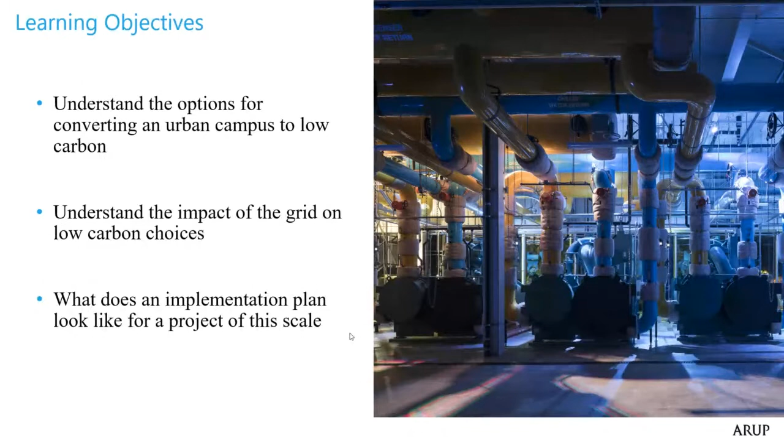So what I hope you guys would get from this are some learnings - basically understanding what the options are and the challenges for converting an urban campus to a low carbon solution, understanding the impact of the grid and the interaction we have with the grid in terms of our low carbon choices, and what an implementation plan looks like for projects of this scale.

So a little bit about our firm, just to give you some context. We are a design consultancy, and we work across the whole urban development theme, looking at individual buildings, city scale, and everything else in between. So my team, for example, we do green building, net zero buildings, etc. A lot of planning work like the stuff I'm going to talk to you about, but we also work with cities and corporations to develop their strategies.

We're about 14,000 people globally. There's about 10,000 projects at any given point, and we've got offices all over the world. In North America, we have about 1,300 employees across 12 offices. I'm based in New York, but I did spend a lot of my time going up and down to Toronto pre-COVID, almost on a weekly basis, to work on projects up there. But I've also worked all across Canada.

One of the things our firm has done over recent years is align ourselves with the UN Sustainable Development Goals. It's a theme that a lot of countries, cities, and corporations are doing as we deal with the climate crisis and a whole bunch of other related challenges. These are a set of goals, I'm sure you're familiar with, that give something of a roadmap about how we'd like the planet to look by 2030. These are various commitments that you make, and then you sign up and develop an action plan to do that. That's been really interesting for us as a firm, because it means we think about the kind of work we do with much more scrutiny, and the kind of projects we want to get involved in - are they actually moving the needle in terms of dealing with the climate crisis, etc.

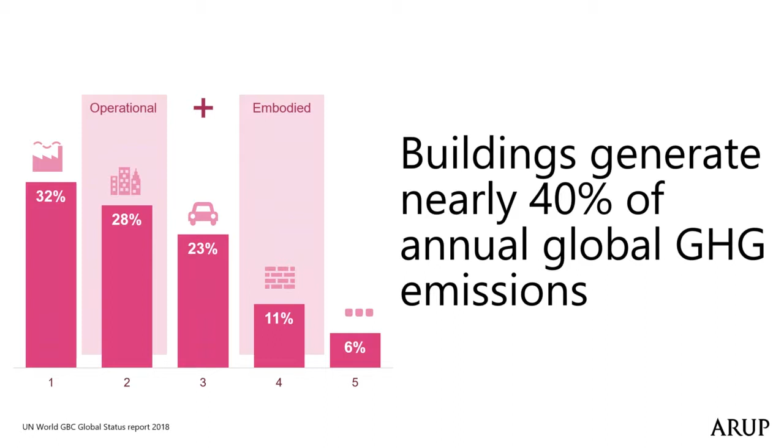But the long and short of it, what it means in terms of meeting some of those targets, the 1.5 degree or even more aggressive reduction, is we need to have a transformational change across our whole built environment, from our transportation, our infrastructure, but also our buildings. And that's some of the work that I'm going to talk to you about today.

So we have developed an approach for doing this kind of work. As I mentioned, the world is urbanizing rapidly, and it's predicted that within 50 years our urbanization centers are going to more than double. So people are looking for space, they're developing denser and denser cities, and then you're seeing all kinds of new cities pop up. I worked on multiple projects in China where you work on a concept plan of some farmland sometimes, and then within 2 or 3 years, an entire city appears from nowhere. So thinking about how those developments are done in a low carbon way is a lot of the focus of our work these days. So we've developed an approach for doing that.

But the challenge is there isn't really a crystal clear answer, it changes everywhere you go. And the reality is, here you are today trying to get to some point in the future, be that net zero or 1.5 degree stabilization of temperature. But the journey to get there over a long period will actually not be a linear journey. You're going to go in different directions, and there's actually multiple pathways to get there.

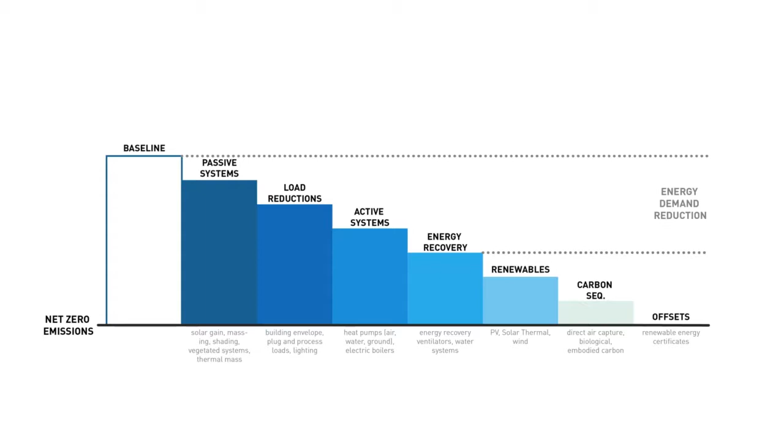We have a whole approach in place for doing this kind of project. Basically, we look at what the goals are, what you're trying to achieve, then look at a whole bunch of different technologies and metrics to screen which technologies would work and which wouldn't, bundling those together into different scenarios to try and meet the outcome you're looking for. Then we develop a whole design to implement whichever option is preferred.

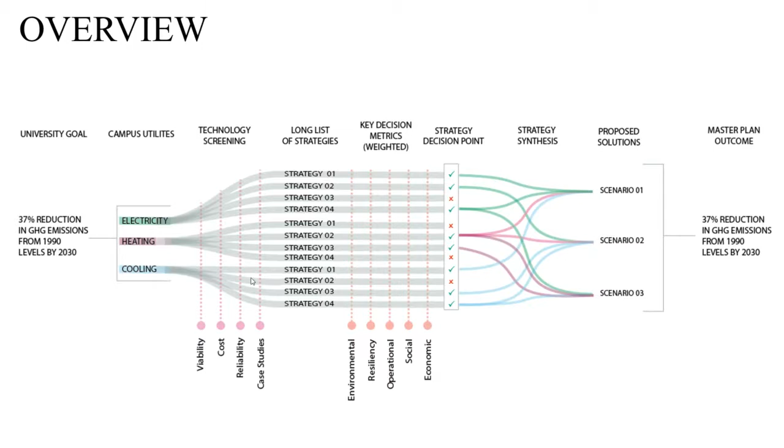The other thing about low carbon planning for campuses, and maybe new development too, is it's not just a technical problem. A lot of people think it's just technical, but it has a lot to do with stakeholders. Within a university you have many stakeholders: yourselves, students and faculty, facilities managers, the people who run the university from an administration perspective, planning departments, facilities, and the external community. There are a lot of different stakeholders involved in low carbon planning, and you really need to consult with everyone.

The other aspect is, as I say, it's not just a technical option, because you can solve any problem technically if you throw enough money at it. It's really about working out the business model that goes along with that - how are you going to pay for it over time, what are the risks involved, and who else do you need to partner with to make it work.

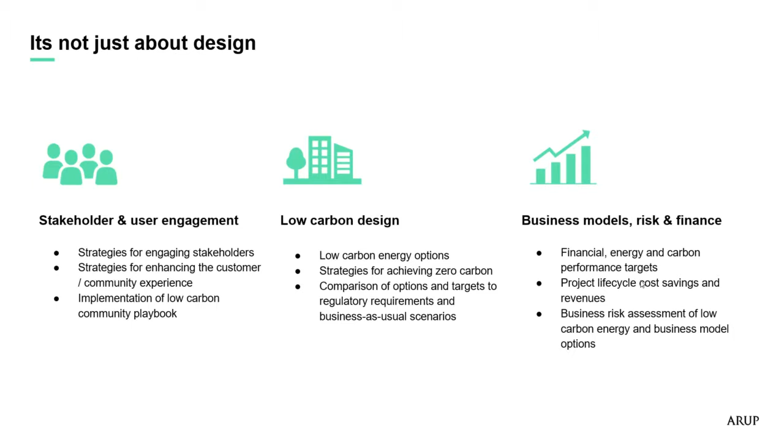You're seeing within the university space a lot of privatization of utilities just now. Universities are saying our core business is education, we don't want to be running the facilities on this campus, that's not our core function. Let's farm that out, someone else can come and do that and just charge us for our utilities. It's also a way universities can make money, because they sell this for someone else to use. There's a big movement for that in higher education just now.

Now I'm going to shift gears to talk about the University of Toronto infrastructure planning work we did, which is the main focus of the presentation. If anybody wants to ask questions, just remember to stick your hand up or put something in the chat.

The university came to us a couple of years ago with three major challenges in terms of their infrastructure. First, the infrastructure, mainly the energy infrastructure, is very old. It's an old university with a fantastic campus and layout. Some of the buildings are well over 100 years old, as is some of the infrastructure - it's been looked after, but it's past its sell-by date.

The second challenge is the university is very successful and growing quite rapidly, with lots of plans to continue growing in the future - so how do they accommodate that new growth? Thirdly was a commitment to reduce greenhouse gas emissions, with some commitments made to reduce by 37% by 2030. We then worked with the university to develop targets for 2050, basically a carbon neutrality target, and how do they achieve that considering they've got old infrastructure delivered inefficiently right now, and they're going to add to the campus with extra buildings that will use more energy.

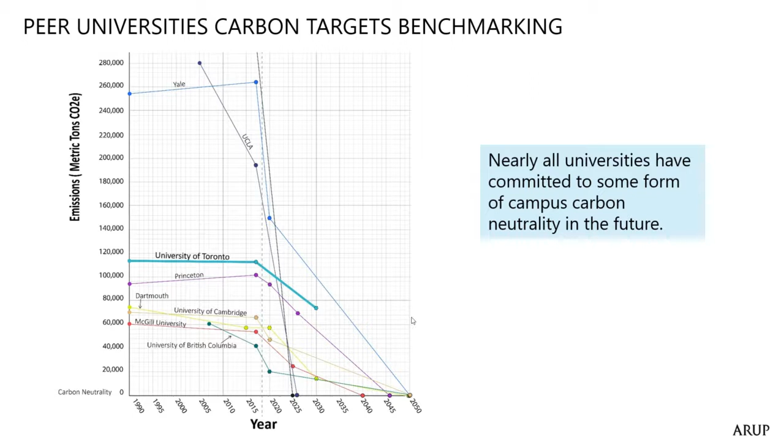Some very progressive universities just blew right past their targets and did not achieve them, so a lot of universities have now revised these targets. We wanted to see where University of Toronto fit in with the pack, so it could develop an ambitious target as well, and continue to be seen as one of the premier universities, ambitious in its carbon goals, because that's important for students and faculty.

And then we look at the climate as well. This talk is mainly focused on decarbonization, trying to reduce the impact on climate. There's this other factor of adaptation or resilience to climate, as in how do you protect yourself from the climate as it's changing.

So that's quite a change. It means if you're designing infrastructure, you've got to deal with increased temperatures, which means you might need more cooling, more insulation, etc. You're getting more hot days, fewer cold days, which could be a good thing, but you've got to design your buildings, if they're built tomorrow, to deal with today's cold weather, even though it might not be as cold in the future. So that poses a challenge.

And then you've got more rainfall to deal with in the urban context - you have to move that away from buildings, reuse it, whatever you want to do with it. Some of these temperature changes can cause issues from extreme heat, which can be challenging for people. Power outages happen because everyone's trying to pull energy off the grid at the same time. Extreme cold still happens too, causing cracked pipes, etc., and then you get flooding as well.

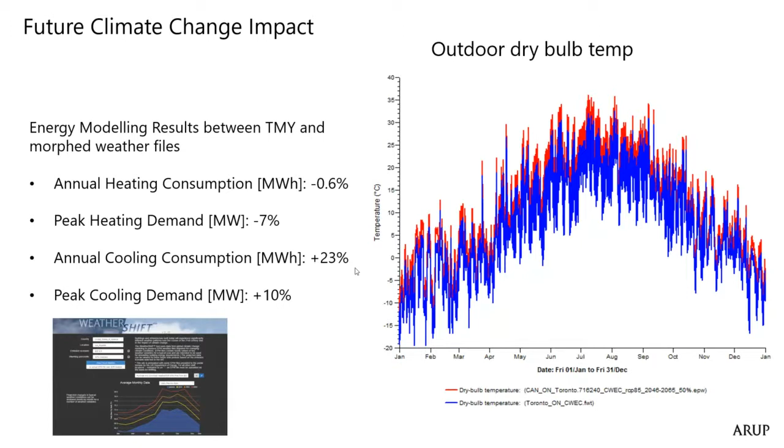We did some analysis here in terms of what this would actually mean for the university - it would mean a reduced amount of heating load over time, but it would significantly increase the cooling load over time by 2050. So it's quite a big change you have to design for in terms of infrastructure.

The other thing we look at as context is what does the grid look like, and this varies enormously wherever you go in the world. Quebec and Ontario have a relatively clean grid. Ontario has a lot of nuclear, some natural gas, a lot of hydro, and some other renewables. Quebec has a much bigger hydro component, so it's very clean. But if you're working in Virginia, for example, in the USA, that's very much 90% fossil fuel based. So that factors into the kind of technologies you choose.

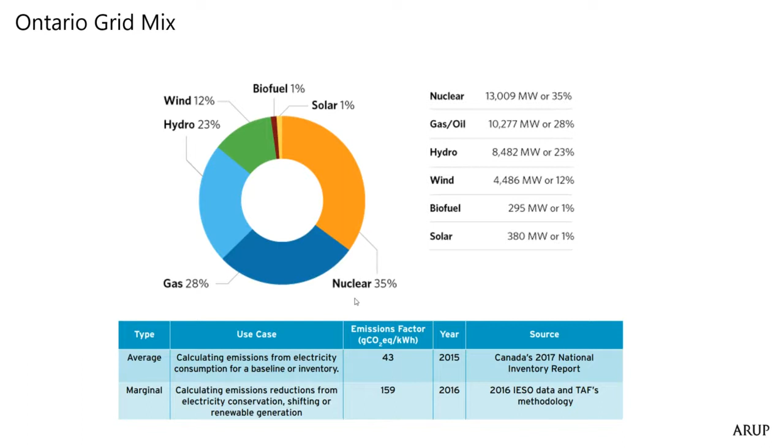The next stage of what we do is pull in the data in terms of existing conditions, how much energy has been used, how much square footage there is, and do comparisons with other universities to see how it's performing. Despite the fact that the university has a lot of old infrastructure, it actually performs quite well compared to other universities, because there's a very good facilities department who maintains it well.

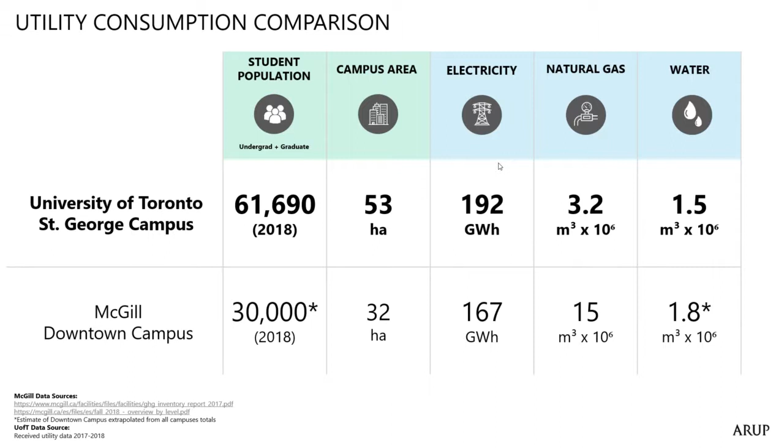Then we start to look at the actual infrastructure that's in place - how it's being supplied. Most of it is centralized within the university by the same facilities team I mentioned, but there are still some buildings that are standalone and not on the centralized systems.

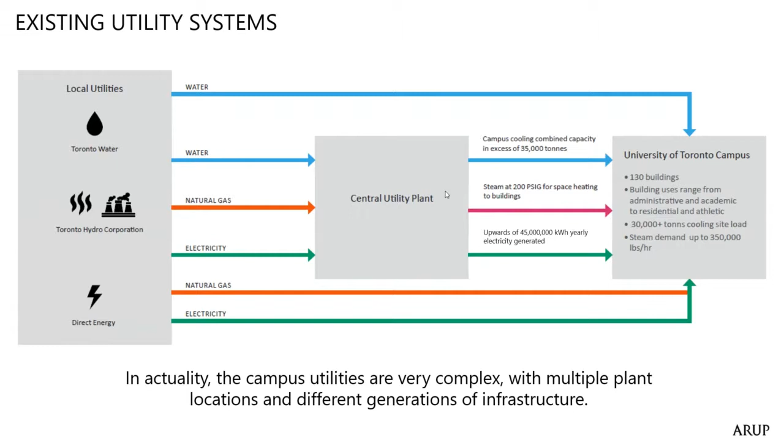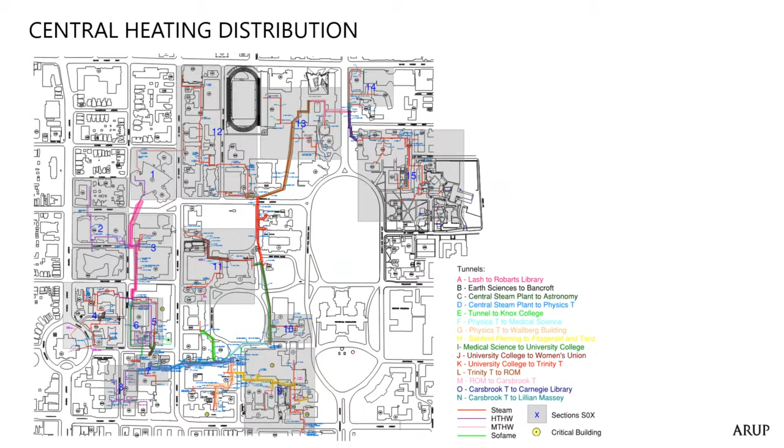This is basically a schematic of all the infrastructure across the university. There's pretty extensive infrastructure going under the streets all around the campus, so dealing with that infrastructure and upgrading it becomes very, very complex.

I mentioned earlier there was some planned growth for the university, so some pretty significant plans are predicted between now and 2050. A lot of that is based on growth plans rather than actual buildings that have been scheduled and designed. But essentially we're talking about an 80% increase in the campus over time, which is pretty significant. When you're trying to drive your carbon and energy use down, adding all this extra growth is kind of going the wrong way, which poses a challenge.

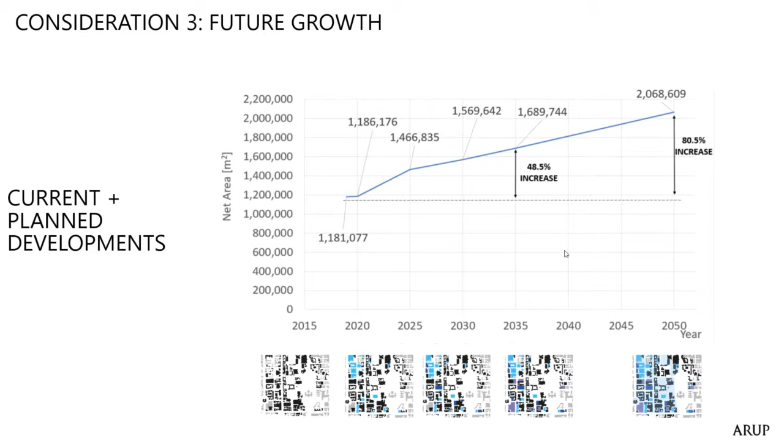But it's not impossible, because as I mentioned before, it's well within our capabilities to design net zero and even net positive buildings now. It depends on the use type—a lab is a big energy hog, and that can be more challenging. But it can be done, it just needs to be thought about very carefully.

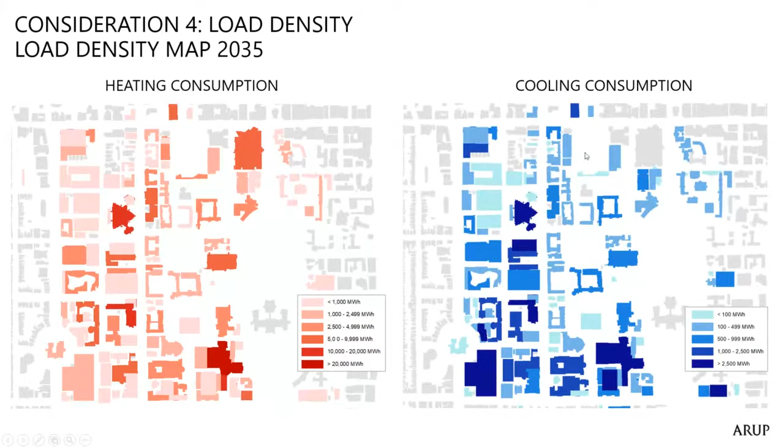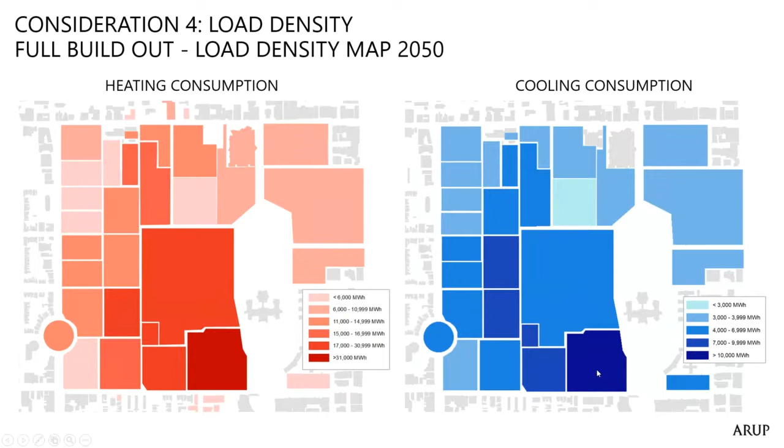So we did some load mapping across the site, and these are heat maps showing where the intense heat use would be, and on the right, where the intense cooling would be over time. When you go to 2050, that increases a lot. So this is all extra energy you have to try and find. The darker the color in the heat maps, the more intense the use—associated with some of the labs, some of the older buildings, and some of the very dense areas.

And this is the same thing with the electrical demand, which increases over time as well.

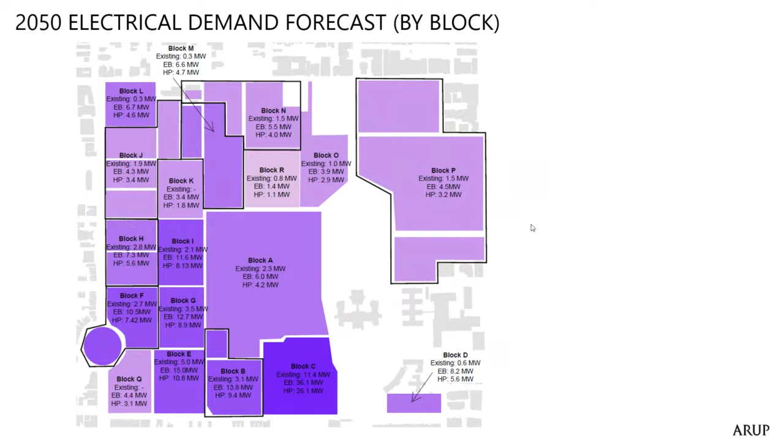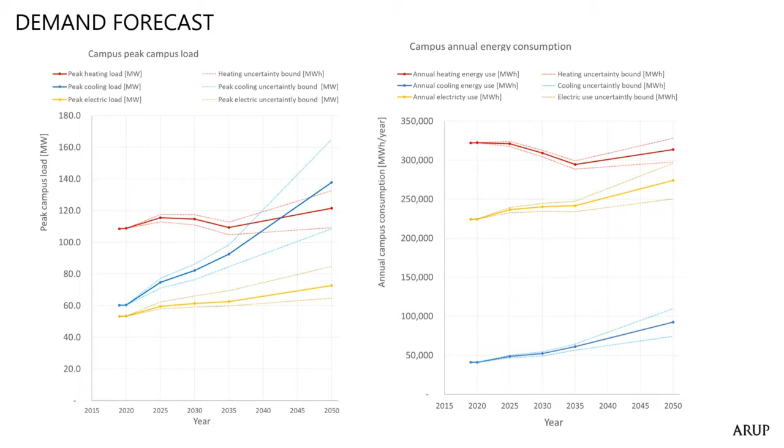So just zooming out for a second—what I was presenting there was just some baseline information of all the things we like to look at to try to understand the problem, as it were. But now I'm actually going to get into what a net zero carbon campus looks like, and some of the brainstorming we do to try to work out how we're actually going to get there.

And if we try to get towards some kind of improvement in our energy and carbon performance without going completely crazy and uprooting all our existing infrastructure, we looked at the carbon emissions in terms of where they're coming from.

So the grid electricity provides quite a lot, about 30 to 40% of the existing energy on the site. And then natural gas provides the majority of the energy coming to the site.

Then we could actually provide quite a bit through on-site solar. Because of the scale of the campus and there's so many roofs everywhere, we can actually provide quite a lot of PV. And then we could potentially use some off-site university land to develop some solar that they could also, through a virtual agreement, feed into the university campus.

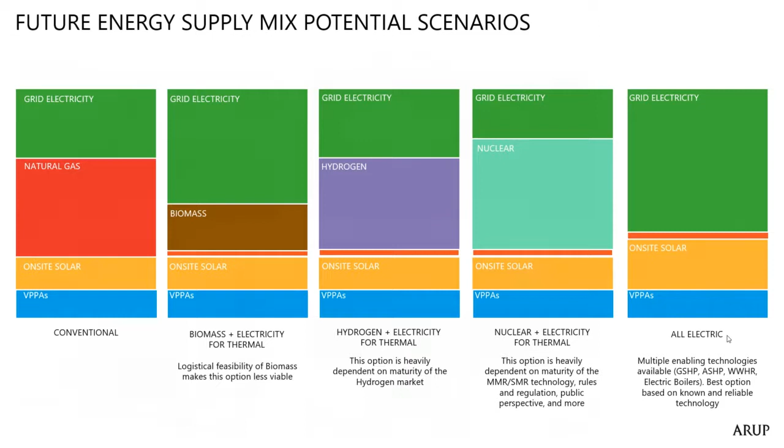As I mentioned, we looked at some other technologies. Biomass, we kind of discounted that just because biomass, it used to be conceived as a zero carbon fuel. People have changed their minds on that now because basically you're just taking the carbon out of the cycle for a very short term and then you're putting it back in again.

There's all kinds of logistical hassles for a university. The scale of the St. George campus, it would be tons and tons of trucks going through every single day.

Deep geothermal is something basically tapping into the Earth's core to get energy out. That just wasn't feasible in terms of what's under the ground, but also doing that kind of drilling in an urban context.

Hydrogen fuel cells, this is something we think will come of age in the future. Hydrogen as a fuel is really increasing in terms of momentum. The research that's going on, for example, in some places you have extensive gas infrastructure. Why rip all that out? Why not put hydrogen in it? There's kinds of challenges with pressure, etc., but it can be done.

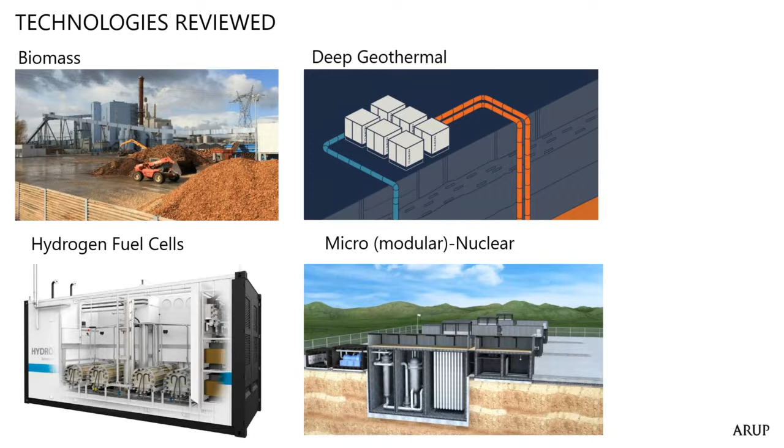And as I mentioned, micronuclear is something very much in development and theoretically is possible as well, but probably too risky to do in such an urban environment. So these are some of the kind of technologies we looked at and discounted.

And then we basically focused on the electrification strategy and how would we do that over time? You can't just rip out all the infrastructure overnight. That would be ridiculously expensive. It would have to be a gradual change over time.

So the concept was to basically phase out the natural gas infrastructure, which is feeding a steam system, which is a very inefficient way of delivering heat, and then phase in electrical energy as a backbone, and then that would have to provide the heating, cooling, and conventional electric. And as I mentioned before, have some on-site PV and some off-site PV to try and get us towards carbon neutrality.

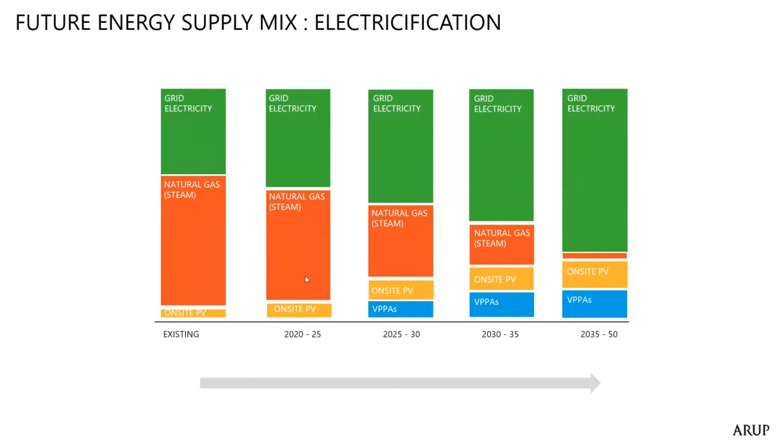So we looked at how we would do that in terms of the technologies, and we came up with a short list of what we called enabling technologies. And the key ones were geothermal, which is different to the other geothermal that I mentioned.

This is basically what we call a ground source heat pump, where in the summer months when you have too much heat building, you're rejecting that out of the building, and you're sticking it in the ground and using the ground as a battery. In winter, when you need that heat, you pull it out of the ground and you dump any cold air in the winter months, and then you just keep on using that cycle.

Another proven technology we looked at is sewage heat recovery. When you have a shower, the hot water goes straight down the drain into the sewage, which actually has quite a high ambient temperature. There are all kinds of projects now - there's a very famous one in Vancouver, I've forgotten the name, where they basically have an envelope around the pipes and suck the heat out of the sewage system.

That heat gets pumped through heat pumps back into a municipal heating system. Then we looked at air source heat pumps. Heat pumps are incredibly efficient technology where they basically convert outside air - you can have water ones, ground source ones - converting heat with electricity into a very efficient medium. These are gaining huge popularity in the world, and the efficiencies are increasing all the time.

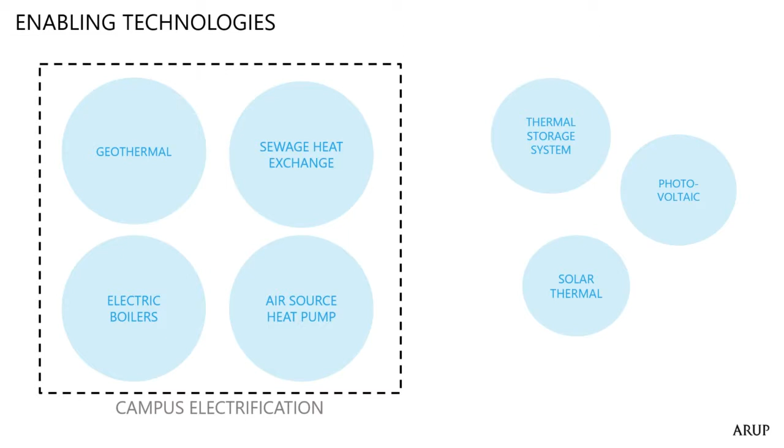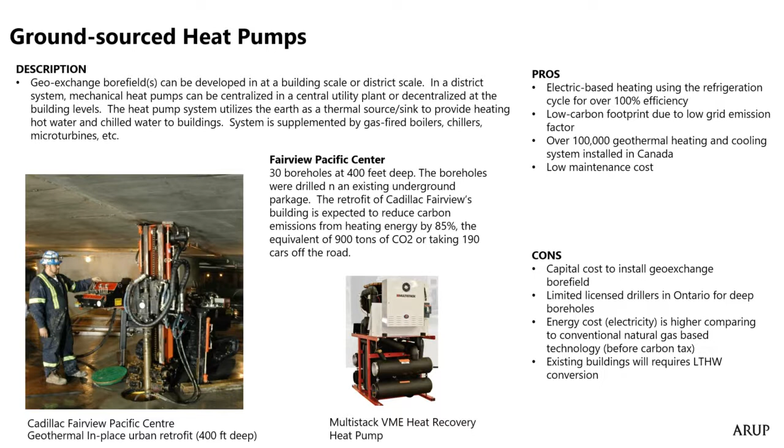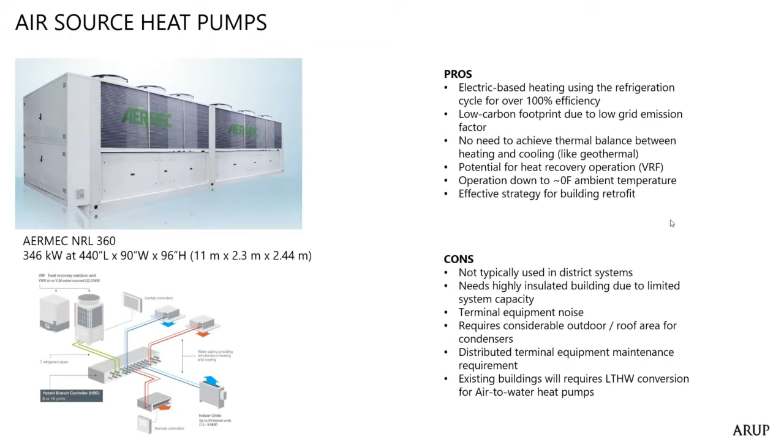Air source heat pumps - these are also very popular, as I mentioned, very efficient. The challenge with these is they do take up a lot of space. You need a lot of roof area with these things because they're pretty giant, for all the heat recovery units, etc.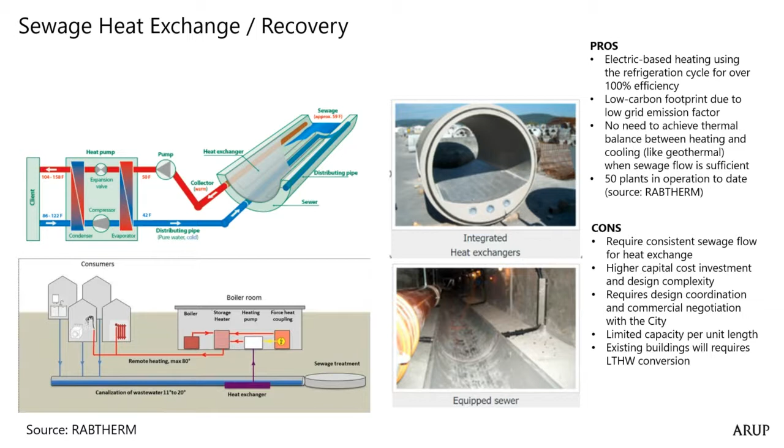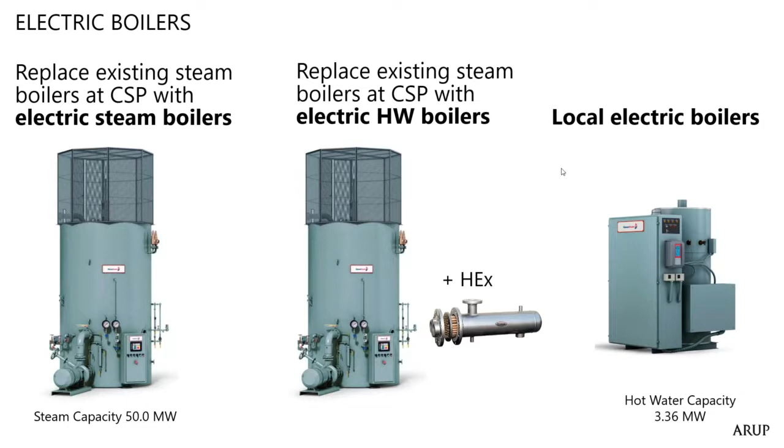Sewage heat exchange, as I mentioned earlier, basically sucking the heat out. The challenge we had with this is there's basically not a lot of main sewage pipes going through the campus, so it wouldn't make much of an impact in terms of the amount of energy that we need. And then, as I said, the electric steam boilers make sense in some ways because you don't have to rip out the infrastructure, but in other ways they're very cost prohibitive in terms of use. So we thought we could use these as backups when we needed them.

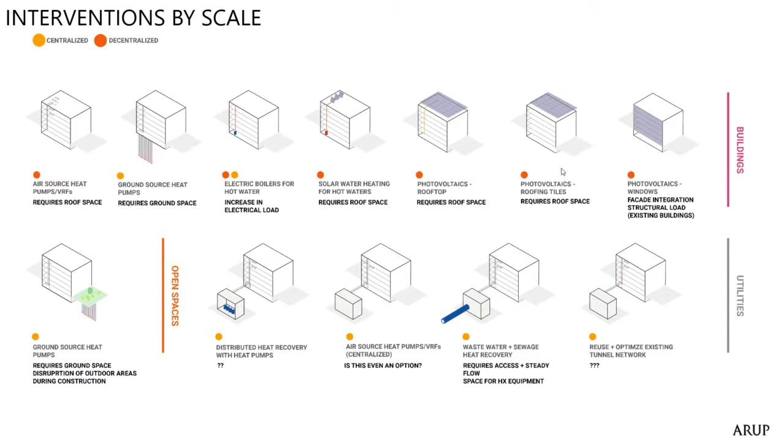I'm describing some really big macro scale interventions here, but the reality is the campus is incredibly diverse, as I was saying - lots of different building types, different use types, different ages of buildings. So it would be a much more nuanced strategy when it comes to actually retrofitting all the different buildings.

So this is looking at what would happen if we actually went all electric, getting into some numbers. This is our current situation - our 1990 baseline in terms of carbon emissions, and this is our emissions right now, from 2018 as close as we get, with a cogen plant producing heating and power at the campus. It uses up tons and tons of carbon - this big red bar here is all the carbon emissions that it produces.

This orange one here is basically where buildings are not on that main network and are doing their own gas. The other two are basically electricity consumed separately from the grid. So that's what it looks like now. If you got rid of the cogen, that would bring down your carbon emissions, and you'd have to replace them with low carbon electricals from the grid.

If you got rid of all the natural gas boilers and went all electric, that would get your carbon emissions down even further. But the Ontario grid isn't completely free of carbon. There's still some carbon in there, so it doesn't quite get you below this line, which is our target for 2050 of 80% reduction. If you went all electric heat pumps, a mixture of ground source and air source heat pumps, we would actually be able to make our target.

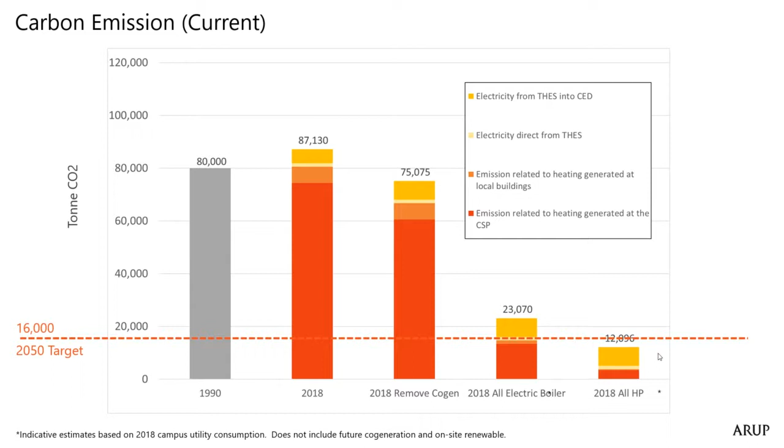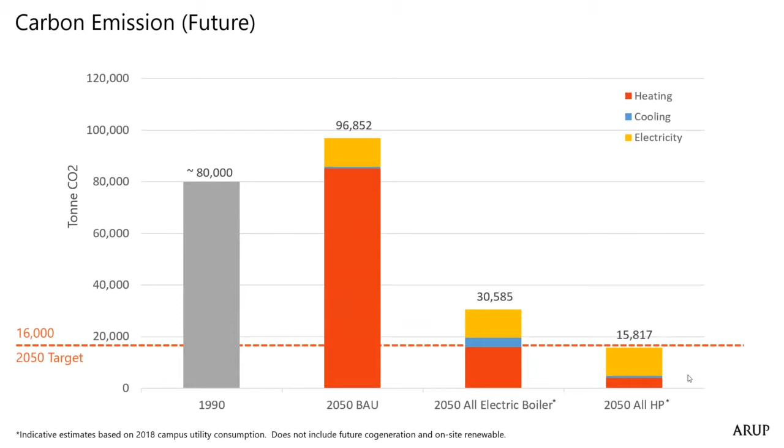If we add on all the future growth I was mentioning, this is what that looks like. Here's 1990, here's the 2050 scenario of business as usual, and here's what would happen if you went with all electric boiler - it still would not quite meet your target. But if you went all out on heat pumps using electricity, because they're so efficient, with lots of ground source heat pumps etc., then you could still make the target. That analysis really focused our work and said okay, we're going to go all electric and go for heat pumps in different shapes and forms.

I appreciate I'm throwing a lot of information at you here, so hopefully you're taking it in and you've got some good questions.

As I mentioned before, one of the challenges with going all electric is we are basically hedging our bets on the grid. The future of the grid is uncertain, because so many things play into it - there are nuclear plants on it that will at some point come off and have to be replaced by something. The question is, will other renewables come on sufficiently quickly to replace whatever nuclear comes off, rather than it being replaced by natural gas or other fossil fuels? We don't really know, but the best guesses say it'll probably continue as it is for some time - it'll get better in some ways and worse in other ways, so it'll basically level off.

But it is a challenge, and this is always a challenge when we're doing these projects in different parts of the world - if we move towards electrification, which the world is doing in general, you have to have your grid toeing the same line, otherwise you're moving in the wrong direction. Right now in Virginia, or some of the southern US states, they're still using coal and have no policies in place to change that anytime soon. Then it would be more challenging to come up with an all-electrification strategy.

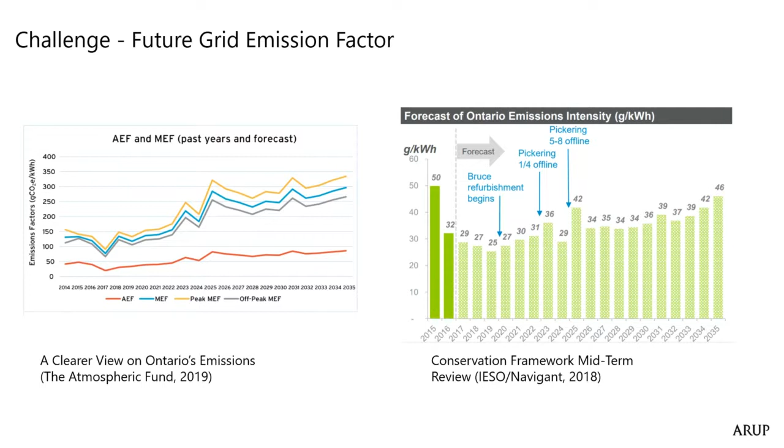So all that analysis I've been showing you basically fed into three main options, and this is where we are. I'm not going to show you exactly where we've ended up because it's a little bit sensitive, but there are three main options we kind of ended up with. One is keeping the central plant and distributing low temperature hot water instead of steam throughout the campus - we'd have steam and then transition to low temperature hot water over time as you retrofitted all the buildings and then the central plant. Then there's having individual nodes - not one big central plant, but different little plants across the site, supplemented with steam in the short term, changing to low temperature hot water longer term. The other option was basically a bunch of much smaller plants feeding 2 or 3 buildings at a time, with lots of air source heat pumps.

But one of the main backbones of all these strategies is that ground source heat pumps would basically feed into all of them.

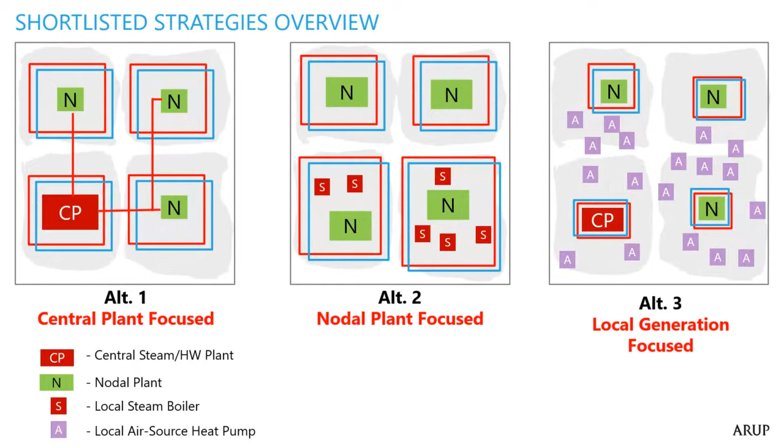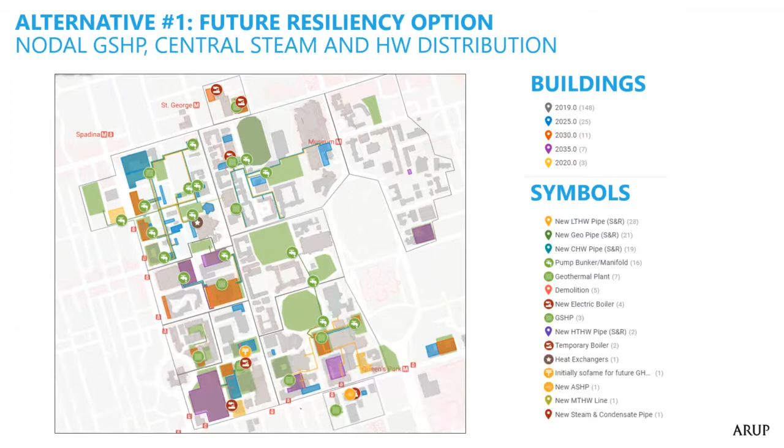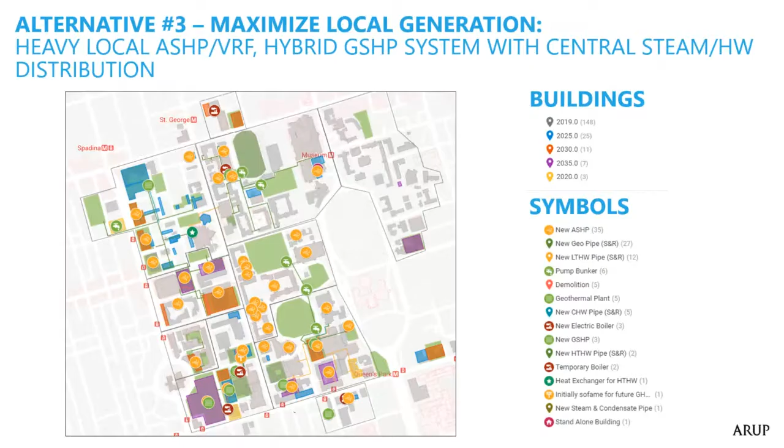As you can imagine, meeting the carbon goal was critical, but so was the operational cost and the capital cost involved. Doing massive retrofits is not cheap, so we had to look at it over a 30-year life cycle to see how it would perform and whether it would basically pencil out against a business-as-usual scenario.

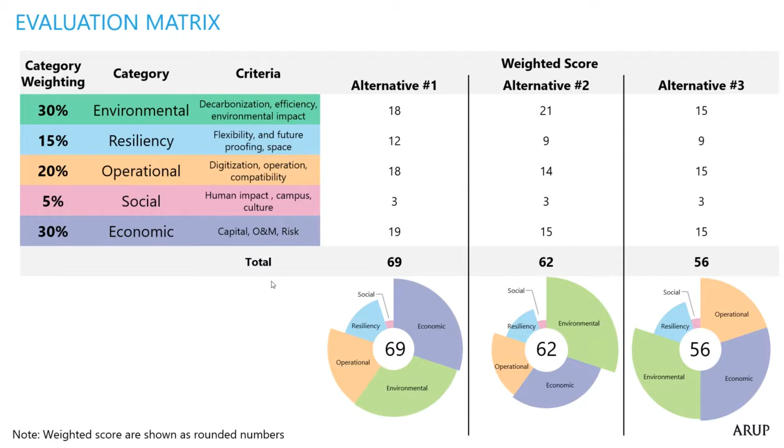It's the end of the University of Toronto. We're still kind of finalizing exact pieces of that. There's a whole implementation plan and tons of detail behind it. I'll just give a very high-level overview.

Just with the last few minutes, I'm going to quickly show some other kinds of projects. This is taking exactly the same concept, but to a completely different place. This is a project we're doing in Cairo just now, working with a local architect based in Toronto. This is a brand new development, a greenfield site on the outskirts of Cairo, and we're looking at the energy strategy for that.

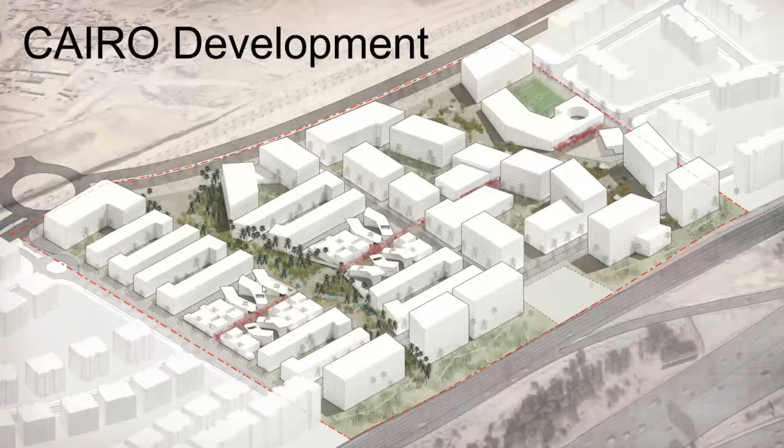How do you try and achieve the same sort of low carbon goal in a completely different context? It's a very similar approach. The energy strategy was based on having a new design that makes it a lot easier, highly efficient and highly insulated.

As you can imagine, it's a very hot and mostly dry climate there, which actually makes it a lot easier to work with than the Toronto climate, because heating is not really an issue. There's a tiny little bit of heating needed if you don't insulate your buildings, but if you insulate them well, it's not an issue. Then we go all electric for whatever cooling is needed.

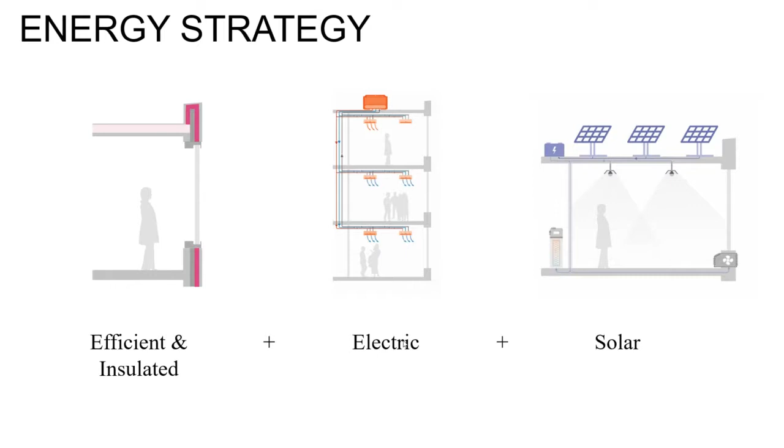Then using PV, the PV resource in that part of the world is amazing. Right now, the grid there is very dirty. They have their own fossil fuels there and burn them to make lots of energy. They actually export energy, but they do have some aggressive goals to become more renewable in the future, so our strategy was basically hinged around that. Egypt has a long-term plan, as does Morocco, to be a massive solar region and actually export energy to Europe because they have such great solar resources there.

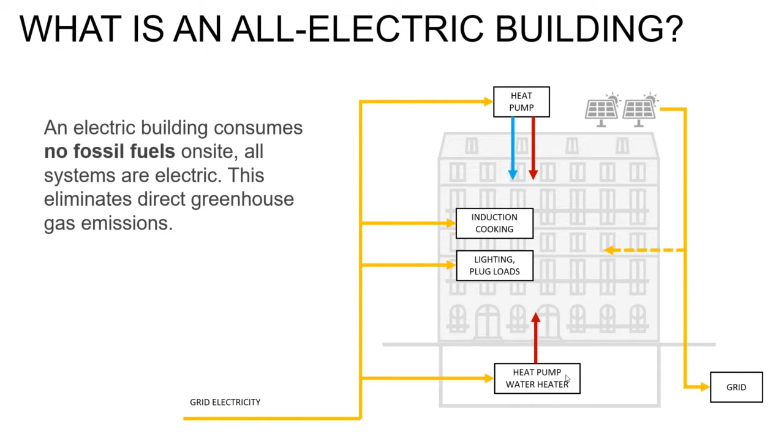So as I said, we went for an all-electric strategy, and that meant all the heating and cooling gets delivered through heat pumps. Cooking is through electric, which is pretty controversial—we'll come back to that. And then even your hot water is delivered through grid electricity.

Hot water too. As I said, it's funny when you work in different places, you have different cultural phenomena that have to factor into your design strategies. One of the things we recommended is going all electric on everything, and there's a cultural aspect, as there is here as well—people like cooking with gas, they don't like electric.

But we've had to do some convincing with the client that induction cooking is actually a much more efficient way of cooking, and it's not like the old electric cooking you used to do. So we've persuaded the client that that's actually something worthwhile.

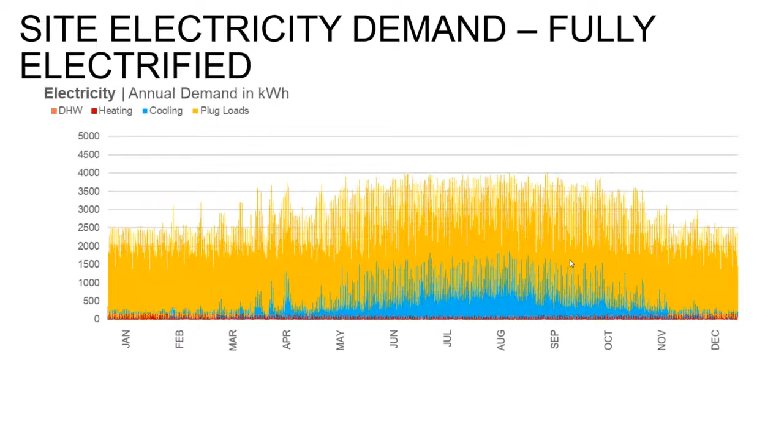I'll skip through this in the interest of time, but this was some of the analysis we did in terms of the loads. One of the questions we had to answer is, what if you went fully electric as opposed to using natural gas for any heating, hot water and cooking? Does it make a big impact? The reality is, it really doesn't.

It increases your overall electrical load by 4% here, and your average energy consumption by 7%. If that was Toronto or even New York, these numbers would look massively different, because you'd be providing all heating with electricity, which would be a big challenge.

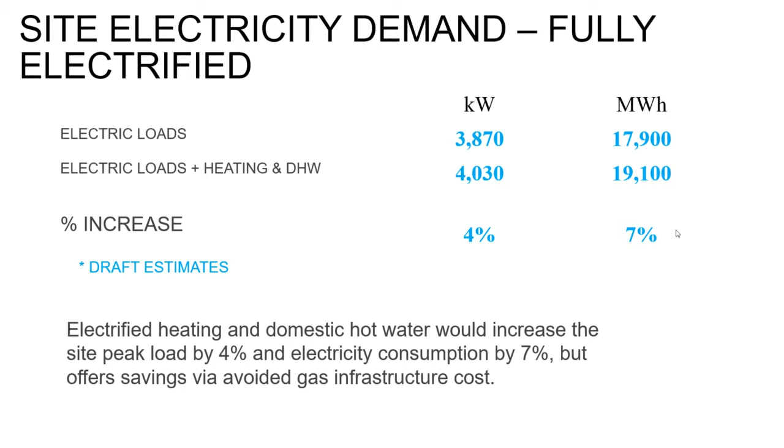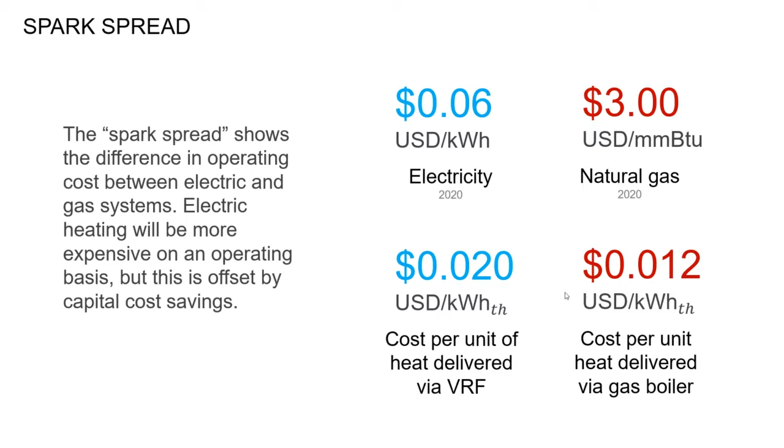But the other aspect is, obviously, by going all electric, it does increase costs. Gas generally across the world is much cheaper. So basically, for every thermal unit you're consuming, you're paying double in terms of going electric as opposed to natural gas, which is a whole kind of education we had to do with the client. It doesn't actually impact them that much—it doubles their electricity bill, but the electricity bills are quite low, particularly if we went for all solar.

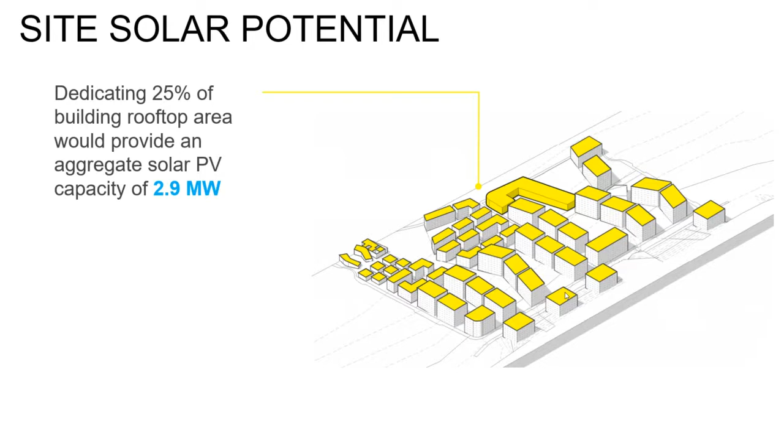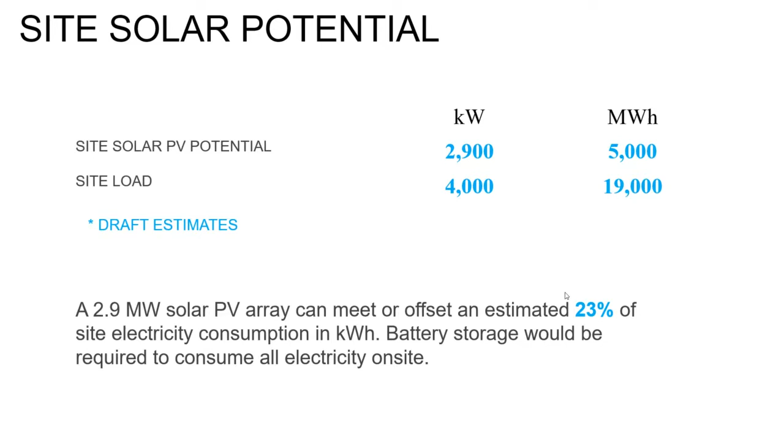If we got 25% of the roof space to be solar, we could generate around 3 megawatts of electricity, which would deliver about 23% of the energy load across the entire site, which is phenomenal. Most developments get like 5%. If you did a similar development with PV in Toronto, you'd get about 5% there, but here the solar resource is so good because of its location and because there's not a lot of humidity in the air—it makes a huge difference. If you added battery storage to that, you could increase that even further.

I think I'll leave it there actually, because I'm conscious that I've been talking for a long time and haven't had any questions so far, although I think one might have popped up. So maybe I'll pause there and open it up to questions.

These are all excellent questions and stuff we need to consider. One of the slides I had at the end, in terms of future considerations, was that energy retrofits is a huge part of this. Incredibly expensive. It's actually sometimes more expensive to retrofit a building than it is to build a new one. That all needs to be done.

So when you change the steam system for a building, as in the delivery system, you also have to rip the steam system out within the building it's arriving at, which can be expensive to do, can be done again, but there needs to be a whole business model to go with that. And then the infrastructure needs to be changed. But the other thing that's a moving target, as it were, is grid makeup. If the whole world goes electrified, that has massive implications for the grid.

I didn't show the analysis there, which sort of summarized how much our electrical loads are going to go up by, but that all has an impact on the wires that are needed, but also the energy supplied through the grid, where it's all going to come from, etc.

And then the other things are electric vehicles. If everyone starts plugging their electric vehicles in everywhere, and that's not regulated, which it can be, that can pose a challenge. Not so much for the University of Toronto because there's very limited parking. But on the positive side, there's things like carbon taxes, which are going to make all of this more attractive to do going forward.